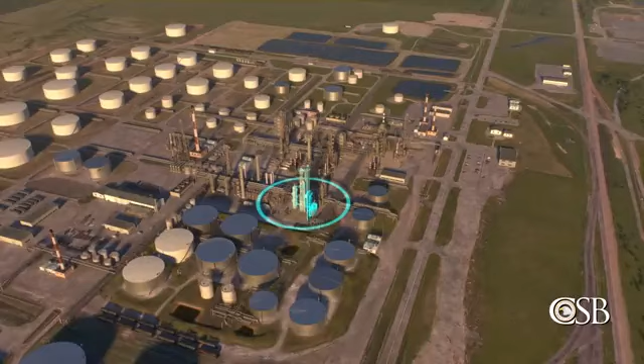April 26, 2018, the Husky Superior Refinery in Superior, Wisconsin. At 5:40 a.m., operators took steps to shut down the refinery's fluid catalytic cracker, or FCC unit, for periodic maintenance and inspection. The FCC unit uses heat and a solid catalyst to break or crack heavy hydrocarbons from crude oil into smaller hydrocarbons, which can then be blended into gasoline and other products.

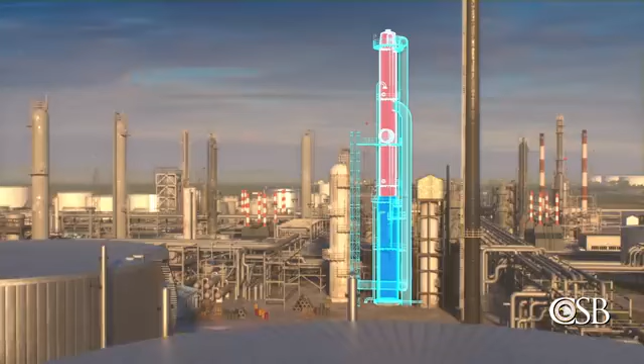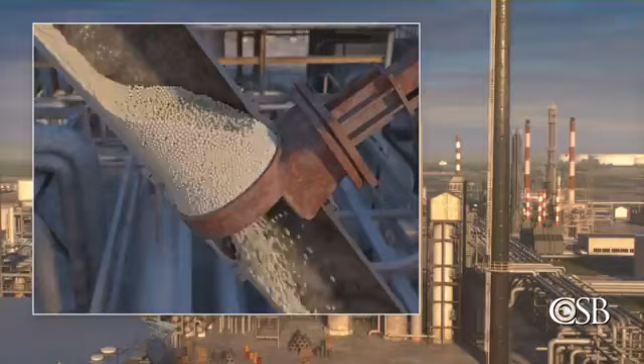Slide valves control the flow of catalyst between a reactor, which contains flammable hydrocarbons, and a regenerator, which contains air. It is important to prevent mixing the hydrocarbons and air, since if they mix, a dangerous explosion can occur. To avoid this hazard, the slide valves maintain a catalyst level between the reactor and regenerator, which acts as a barrier. To initiate the shutdown of the FCC unit, refinery workers stopped the flow of hydrocarbons to the unit and closed the two slide valves connecting the reactor to the regenerator.

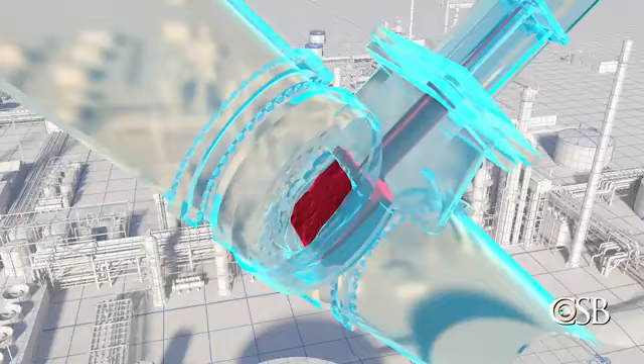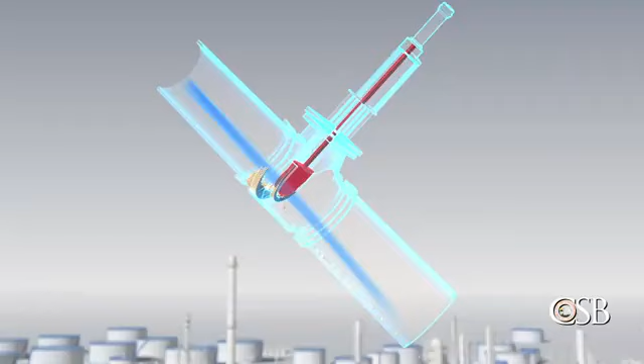But unknown to the workers, one of those slide valves was eroded, and even though it closed, it could not maintain a catalyst barrier in the reactor. As a result, the catalyst from the reactor fell through the valve to the regenerator, leaving no protective barrier between the two pieces of equipment. This allowed air from the regenerator to flow backwards through the slide valve into the reactor, and then into equipment downstream of the reactor, which contained hydrocarbons, forming a flammable mixture.

At approximately 10 a.m., the hazardous mixture of air and hydrocarbons found an ignition source, and there was a large explosion.

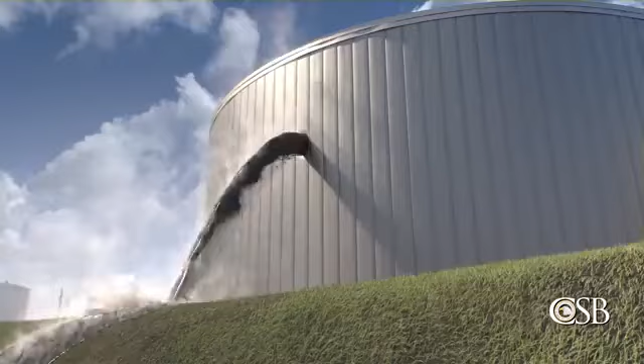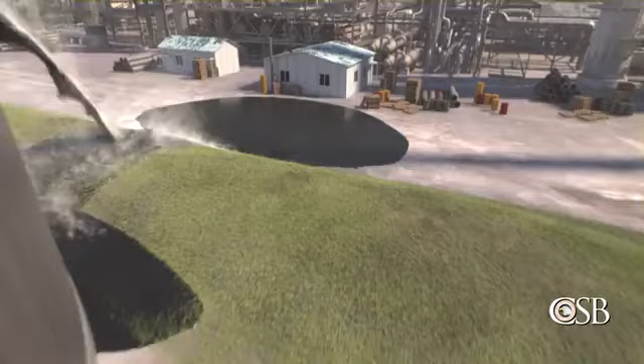Debris from the explosion flew about 200 feet and hit a large above-ground storage tank, puncturing the side of the tank and releasing hot asphalt. Asphalt poured out of the tank over the containment berm and into the refinery's operating units, where it spread along the ground. At around 12:15 p.m., the released asphalt ignited near the storage tanks, and a fire broke out.

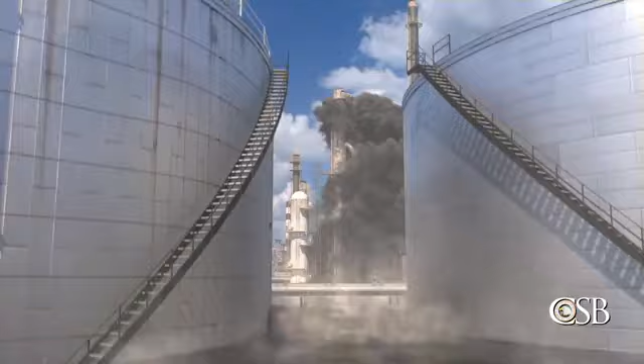The fire traveled along a stream of asphalt to the refinery's crude and FCC units. The fire produced a huge plume of black smoke, leading to the evacuation of a portion of the town of Superior. Typically, this type of asphalt fire can burn for days.

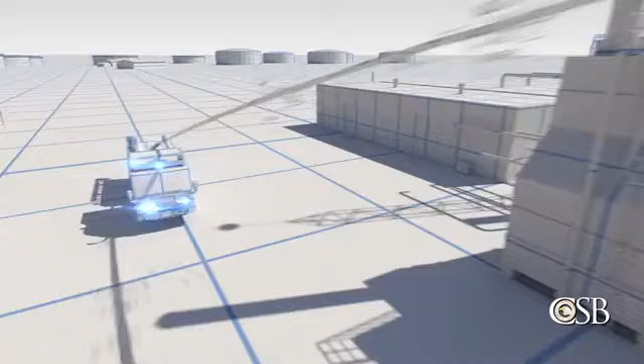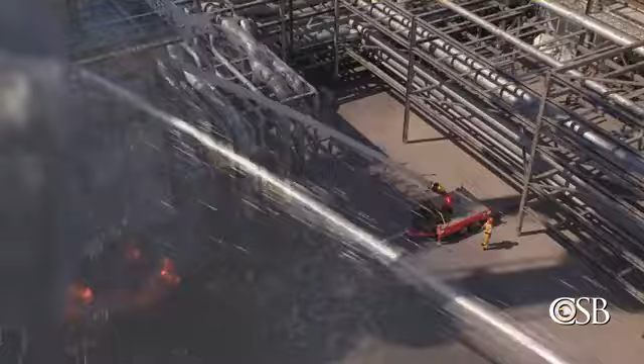A plan to extinguish the fire was developed by the refinery's emergency response team. Around 3 o'clock, they began to address the asphalt fire together with the Superior Fire Department. A fire truck drove to the edge of the crude unit, and emergency responders sprayed dry chemical fire extinguisher inside to fight the fires that had broken out there. Responders also used two stationary hoses called monitors to shoot water into the crude unit in an attempt to extinguish the flames.

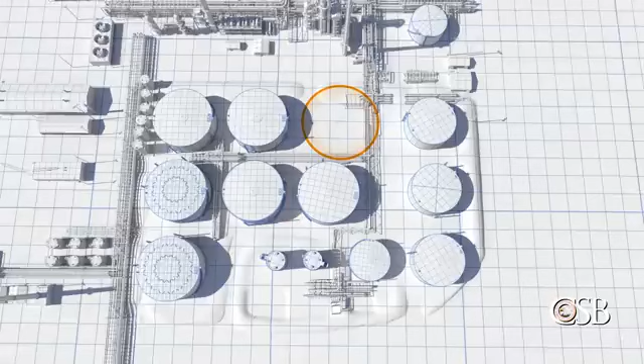While these fires were being put out, over by the storage tanks, emergency responders began to approach the large area of burning asphalt. The emergency responders' plan was to push the asphalt fire into an empty area near the storage tanks, and then aggressively attack the fire from multiple directions.

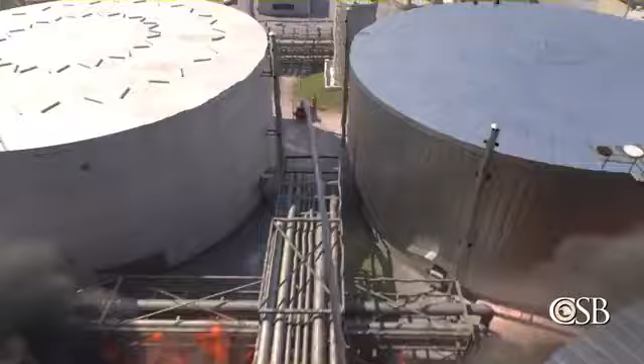First, they used two monitors, one to the north and another to the west, to sweep water to push the asphalt fire toward the designated containment area. Then, when the fires within the refinery's units had been extinguished, the fire truck relocated so that it could spray the burning asphalt in the containment area with foam from the east.

Around 5:30, an additional team began to attack the fire from the south, spraying foam from a monitor. At this point, the asphalt fire was completely surrounded within the containment area. With the fire contained, emergency responders were able to put out the asphalt fire at around 7 p.m.

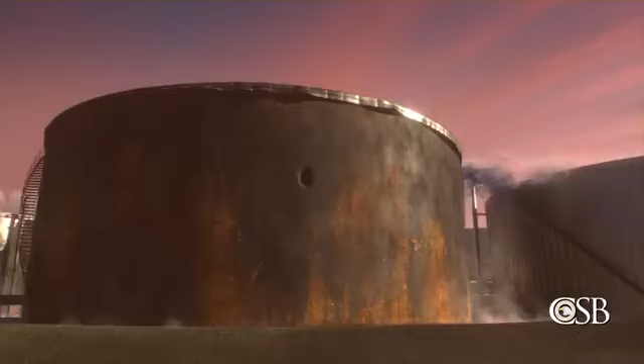The asphalt fire had been extinguished in a matter of hours, as opposed to days, as had been initially feared. The evacuation order was lifted, and Superior residents were allowed to return home. Nevertheless, 36 Husky employees and contract workers sought medical attention for injuries.